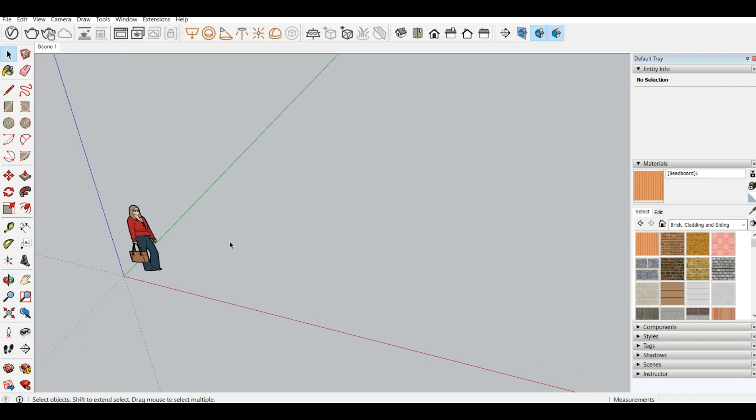In the last video you already learned about the basics of SketchUp. In this video we'll go one step further and learn about V-Ray as well. V-Ray is an incredibly powerful renderer, but it's also very easy to use, and it combines real-time and photoreal rendering.

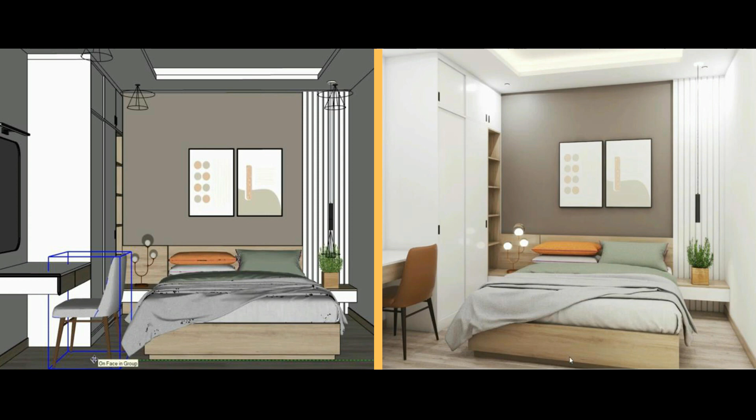I'll put up one more comparison picture so that there's more clarity. Now again, the left one shows how it looks in SketchUp and the right one shows how it looks after we used V-Ray. So you get true to life lights, cameras and materials, which gives real life like characteristics to your model in V-Ray. Basically you'll get a vision of how the real thing will look before it's even built. So the high-end materials in V-Ray provide better quality and lifelike output basically.

So I'll open the V-Ray asset editor first. All I need to do is a left click here and wait for it to open. Okay, so here we go. So this is the dialog box, and first is the material tab.

So click on the materials tab and then click on this arrow in the left hand side, and a sub window will appear. So here you can see the inbuilt material that V-Ray is providing, and secondly you can also see the create tab through which you can create a material of your liking, like you can create generic or emissive. Emissive can be used to create lighting and stuff.

Also you can see car paint here. There's bump as well, which can be used to define groovings in walls or tiles, and you can use all of these to create your own material.

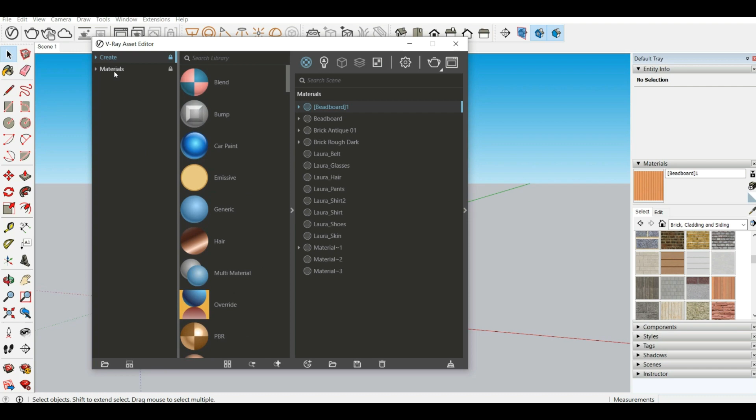In the bottom left you can see a file like icon. From there you can also import other files as well. So right here, as you can see, one more interesting thing is these brick designs which aren't available in SketchUp. These are basically the files that V-Ray offers, which you can apply on any material. These are high definition and high end materials.

Here you can see like this emissive material, which is basically used in lights. So the light basically won't have a color of its own because this is SketchUp, but if you want to show a glowing bulb, for that you can use the emissive material. And also here there are some LED materials.

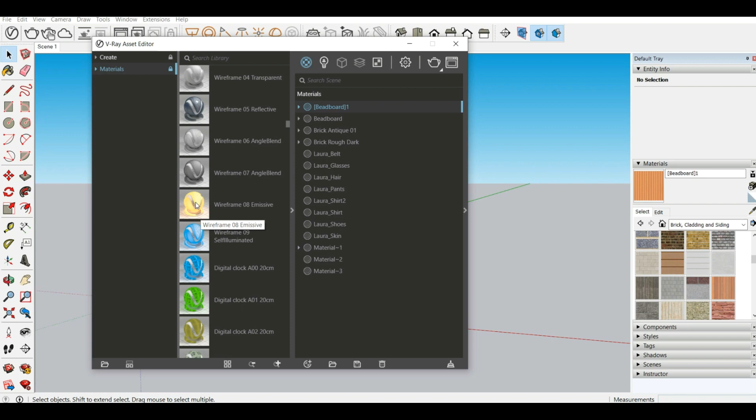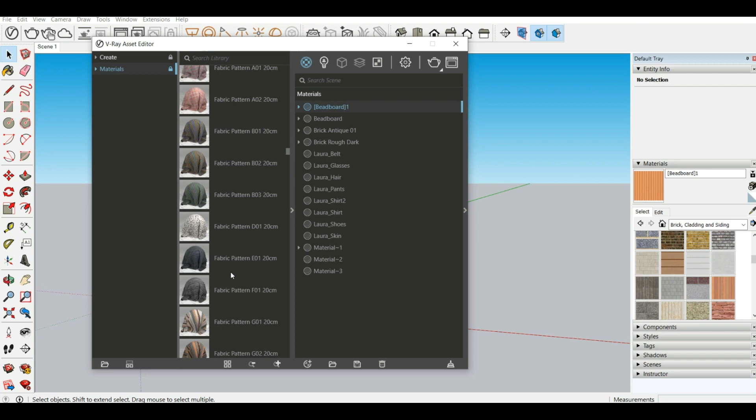After that there's carpet. You can apply material to carpet, but how to get the fibers and carpet's bumpy effect, we'll talk about that after this, on how to produce that kind of effects. Now you can see the curtains. Here are the curtains as well. Now most of the material that you require will be available here, like here you can see glass, gold, other metals, leather, water is here, and much more can be accessed through here.

After that, let's get to lighting. I'll close this one. We'll close the left hand pane and open the right hand pane.

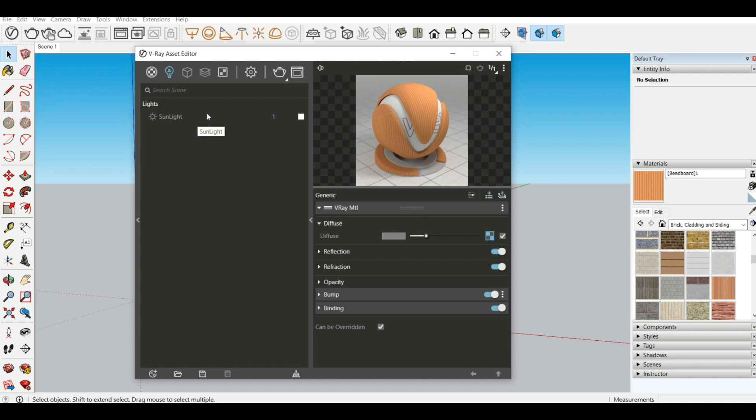First you can see here sunlight, which is present by default, but as you'll add more lighting to your model, all of those lights will appear below the sunlight, below or above, in the lights pane. And even from here you can turn off the sunlight or change its shade a little bit. All of that can be done from here.

Now as I clicked on sunlight, it shows that currently sunlight's color is white. So to change the color, simply click on the color box, and from this color picker choose the desired color for the sunlight. Here some recent color selections which I did are present as well. So from there I'll choose warm shade, and here you can see on the object a little warm effect is visible. So you can do all this by going to the color picker.

Besides the color picker is a box through which you can change the intensity of the light as well. But by default the intensity is usually the best, but of course it depends upon you what kind of intensity you want. You can also flip the switch here to quickly switch off the light and show a night view in the model.

Now also there's the switch I was talking about. Now also there's the geometry tab.

In geometry, the first section, like I just told you about the carpet and the fibers or a fur effect, that you can add from here. When we'll add on effects, they'll appear in here.

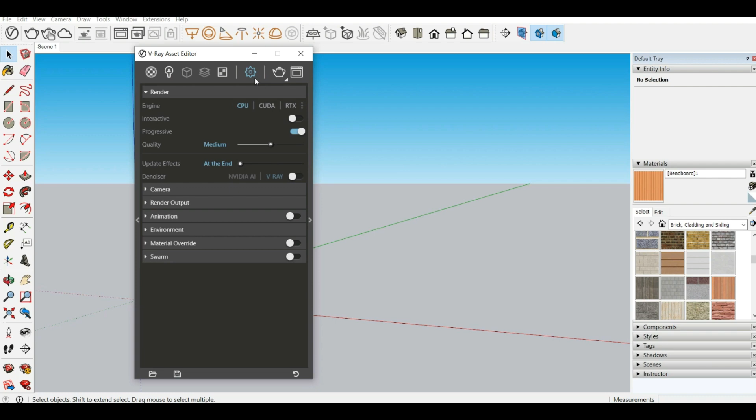Now the next important thing is V-Ray settings, so we'll get to that now. Here you can see interactive render option. Interactive rendering automatically updates the rendered image in real time as you make changes in your scene. I'll show you practically how it works.

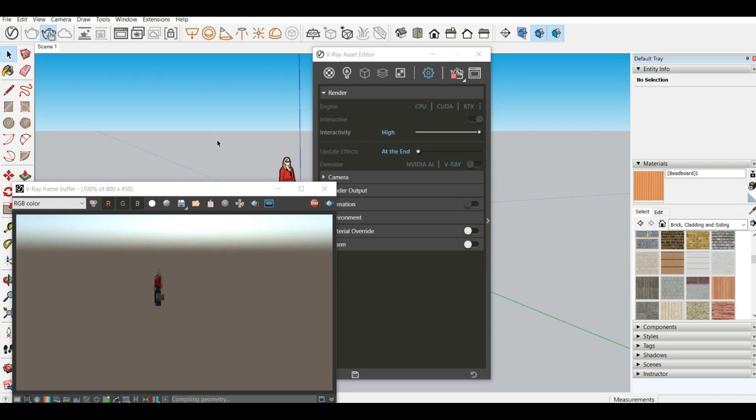I can shift camera angles or do some changes in the model, and all of that will be reflected in real time in this small window here. I can zoom in as well. So this interactive render is very useful as it allows us to quickly view how our model looks. For example, you don't want to render the whole thing, you just want to know how the model will look if you change a light within it, a single light. For that you don't need to redo the whole rendering, so you can use interactive rendering. That is basically the purpose.

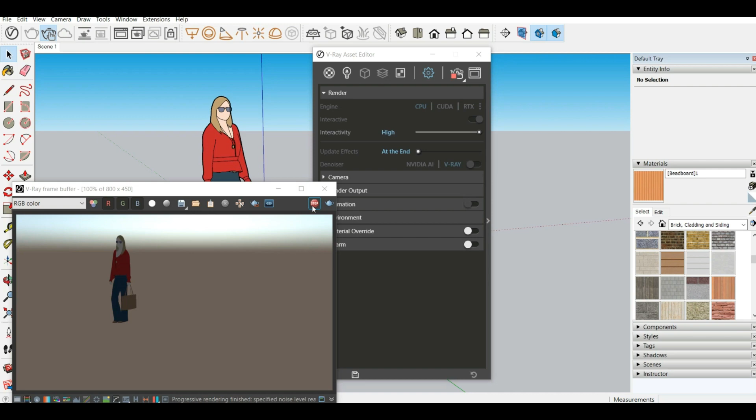Now from here you can start and stop. I'll just turn it off now.

Here now there are some more options like quality. You don't have to change much here. People stress a lot about these settings, but basically the default settings are here, as you can see. Now you can set it to very high and rapid, that will be more than enough for you. If you are having a good PC, you can create high quality outputs.

Now as you can see, there is a denoiser as well here. Basically when you render something, you can have fine grainy pixels. If you don't want that, and rather want a smooth texture, you can enable it. Now here two options, NVIDIA AI and V-Ray, are available. I'll suggest using the inbuilt V-Ray denoiser if your graphic card is not that high end. You'll also get good quality if you're using a high end graphic card.

So now we'll get to camera. In camera there's basic stuff like what kind of view you want and what kind of angles or effects you want in your scene. Like you can see there's the basic depth effect and all the other options. I haven't changed these ones, these are set to default. Now when you start working with V-Ray and SketchUp, the default settings are more than sufficient.

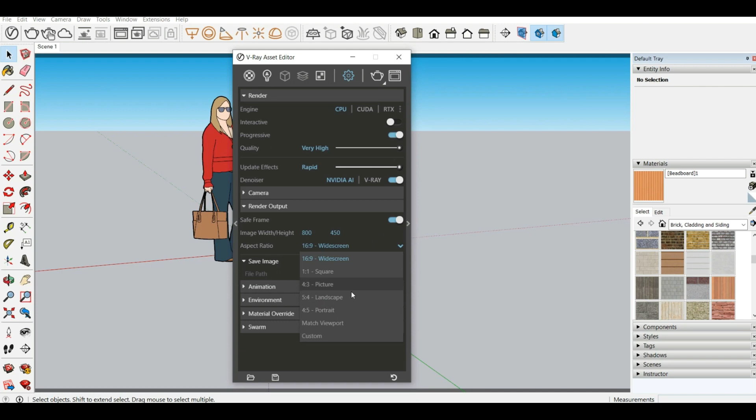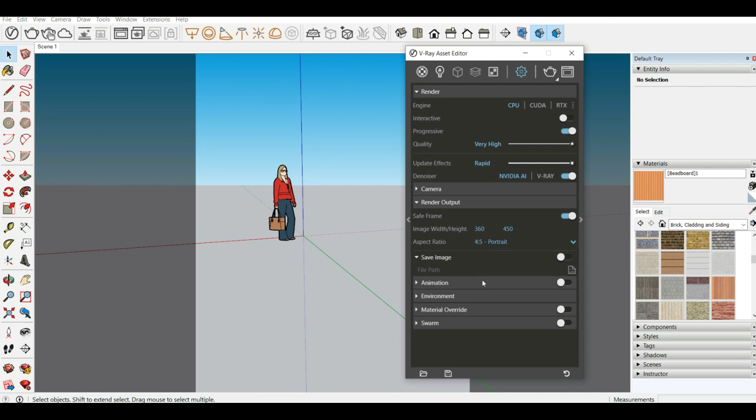Now we'll move on to the render output. Here we can do some adjustments in the default settings, of course. Like you can change the safe frame, you can make some changes here. If you want a vertical frame, you can select portrait mode and it will change the frame like this. Now if you want a render output, it will be portrait. Here you can see it in the interactive render menu, but I'll suggest keeping it to widescreen, which is 16:9. It will be best for you in the long term, and it looks good as well. That orientation is basically used everywhere.

Now you can see the animation option, which will be useful only if you make an animation in SketchUp. But for animations and video, I'll suggest that you use Lumion.

So also you can open this right arrow and view some more settings here. Now as I have kept the quality at very high, all these settings are enabled, but as soon as I lower the quality, some changes can be seen here. Now these little settings, you'll have to practice the use of, as every scene requires a different set of settings. Like if you have made a scene with the settings I tell you, and you want to add just even a single light, that can change the whole render of the model. It may increase the brightness or highly increase the exposure, so you have to keep that in mind and practice for that. So I'll just tell you some basic things like quality and denoiser, that's more than enough for the settings. Don't go that much in depth with the settings.

As soon as you get more expert when using V-Ray and SketchUp, you'll be able to distinguish what kind of settings you need. So now I'll just close this window.

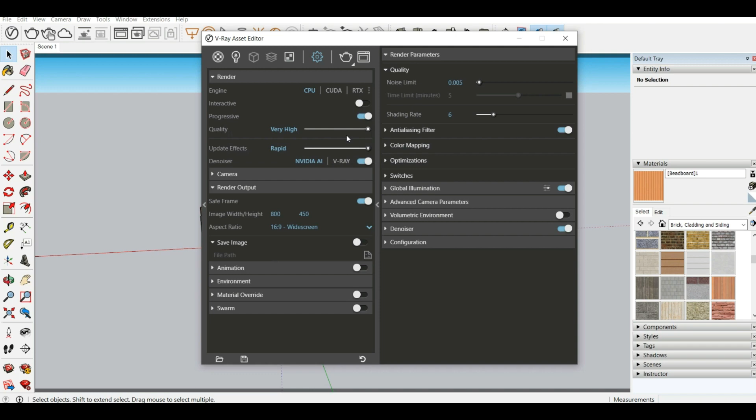Now this button is used to start or stop a non-interactive render. Like if you want to start a render, you can click on this button and the rendering will start. This is pretty basic. Also you can stop the rendering from here. Now I'll close this as well. Now this again is the interactive rendering button which I just explained.

Now here is Chaos Cloud. Chaos Cloud is a cloud rendering service for V-Ray software. Cloud rendering allows you to send your render jobs to Chaos group's rendering service instead of using your own hardware. So if you have a good PC, you won't be needing this. What it actually does is export your project and render it with Chaos group's hardware.

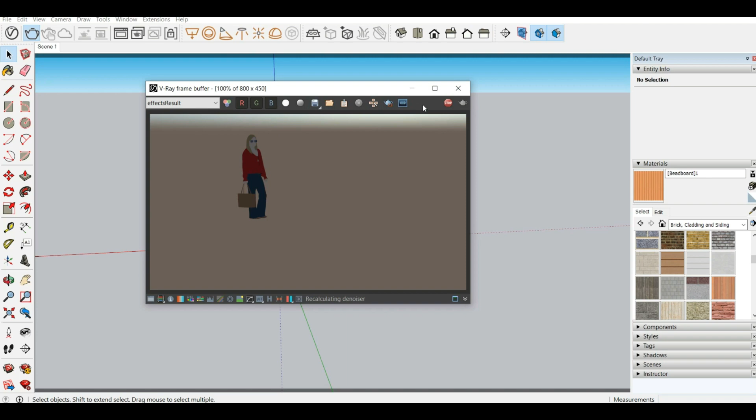I'm pretty sure this service isn't free. Then we have the viewport render and the frame buffer. This is basically the window that appears when we start rendering.

Now suppose you want to render only a particular portion of the model, like the face of this lady, and ignore the rest. I'll select it using the render region option and click on render last, and it will render only the selected region and ignore the rest. Now if I remove this and render again, the rendering of the whole region will start again. We use this option because, for example, if we add a light, a chair, or some other element to the model, or a material to it, we want to know how it will look while ignoring the rest of the region. That's what the render region option is for.

There's also a batch render, same thing, just multiple rendering instead of single.

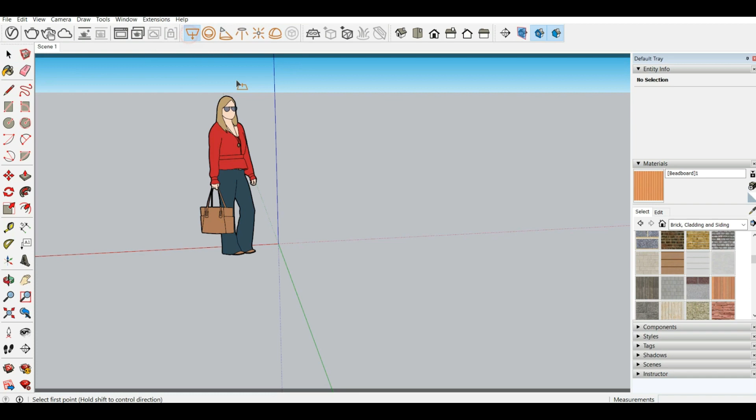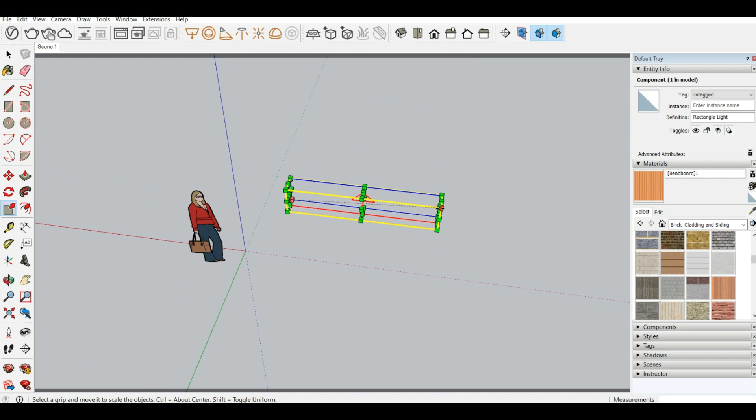So moving on, there's a rectangular light. Different lights will have different types of effects. I'll show you how this rectangular light works. This is a rectangular plane light, like a cove light which can be used in false ceilings. The effect of those lights is given like this. I'll scale this and transform it into small strips, and also scale it in length and width according to my needs and the needs of the cove it's being put into.

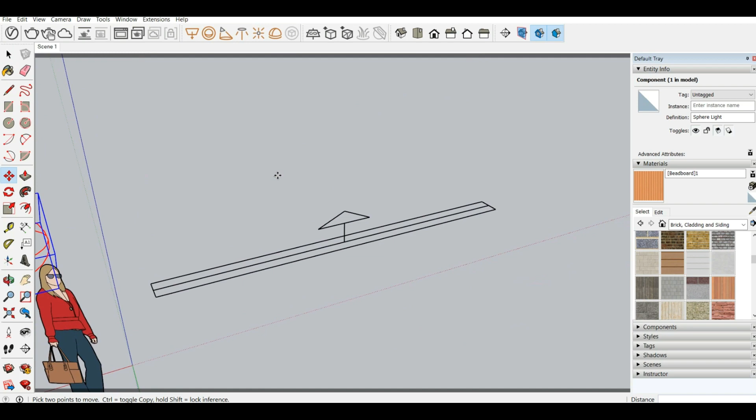Then there's sphere lights. These can be used if you want to give lighting to a bedside lamp or a bulb. I'll place it here. If you want to move it, use the move tool and place it around how you like.

Okay, here we go. Now there's a spotlight. A spotlight is a powerful light. For example, when you go to theaters, there are small lightings which can be directed so that they hit only a small area, lighting up only that area. This can be created easily like this.

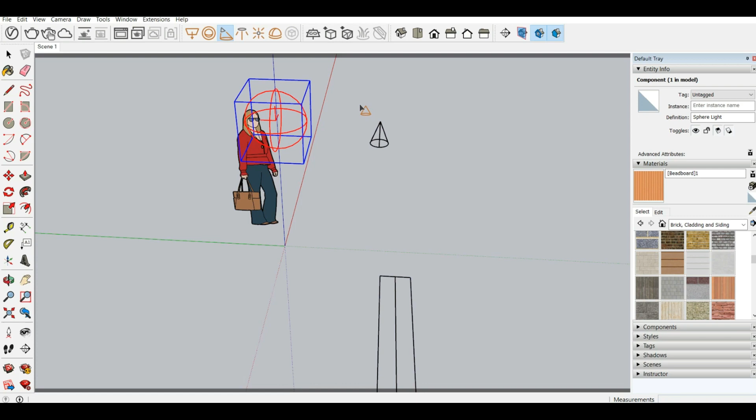Now there are IES lights which need to be imported. As soon as I click on it, Windows Explorer will appear and you need to import that light. These lights will be provided to you guys by us in the drive, probably with images, and you can get these from over there. You will be given all of these, so be sure to try these lights yourself.

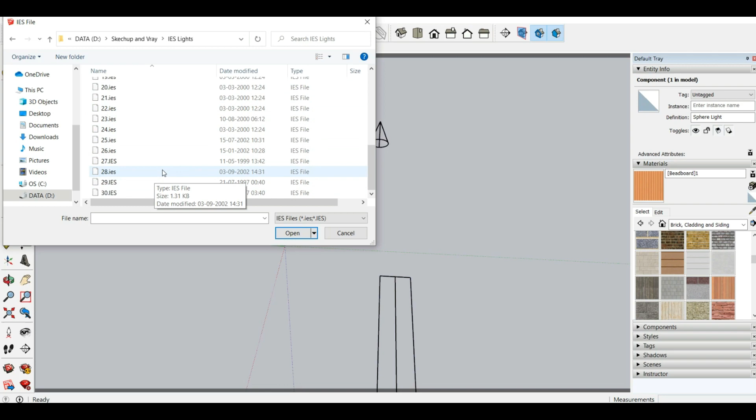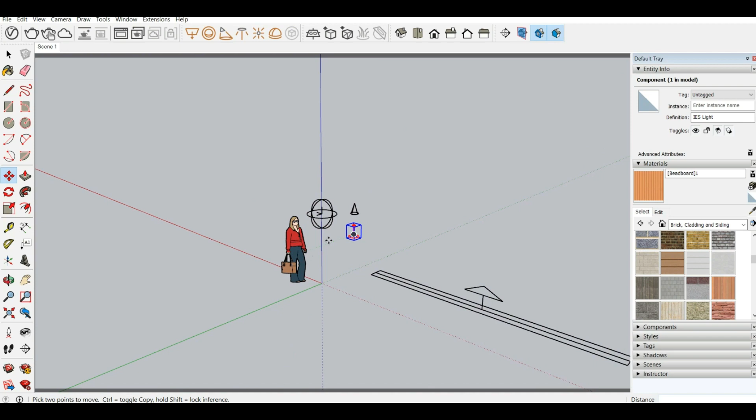Right now I'll just open any of it. So I just opened light number 30. Now it may look like it's near, but actually it's a little far from the region, so we need to bring it closer. So here we go. Now you can move it with reference to the head of the lady, so that's also an easy way to place objects.

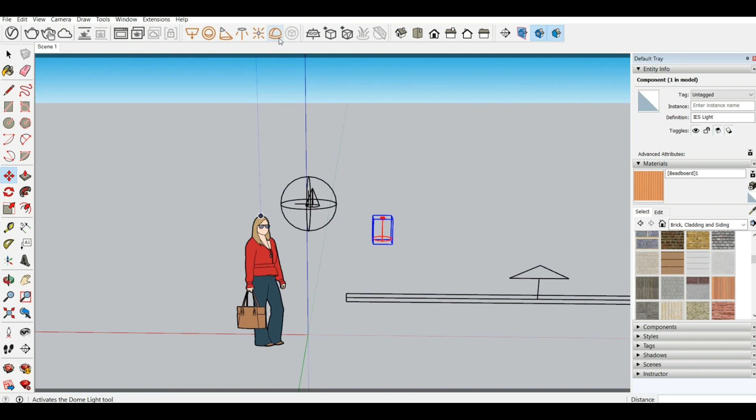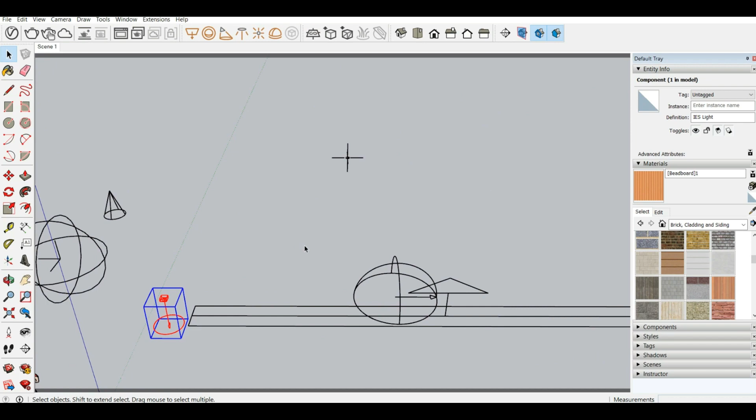Now there's the Omni light. This is a normal light, nothing to explain about it. The sphere light gives 360-degree light, and basically Omni is the same. Now there's a dome light as well, which provides light above a plane, so there won't be any lighting below the surface of the light. It will give light above the surface only.

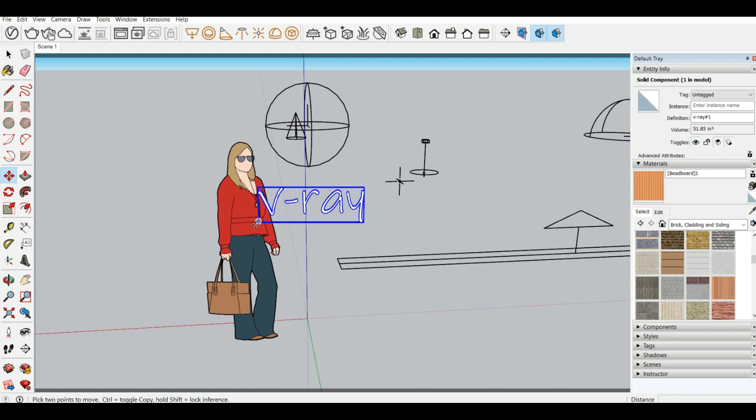So then there's a mesh light. I'll illustrate by creating a text. I'll type V-Ray, place it like this, and move it a little. I'll put up a temporary texture on it. Now when the text isn't selected, the mesh light won't be operatable, but as soon as you click on the text, it becomes operatable and the text changes into that form, becoming a mesh light. That is how you create mesh lights. You can even use other objects for that.

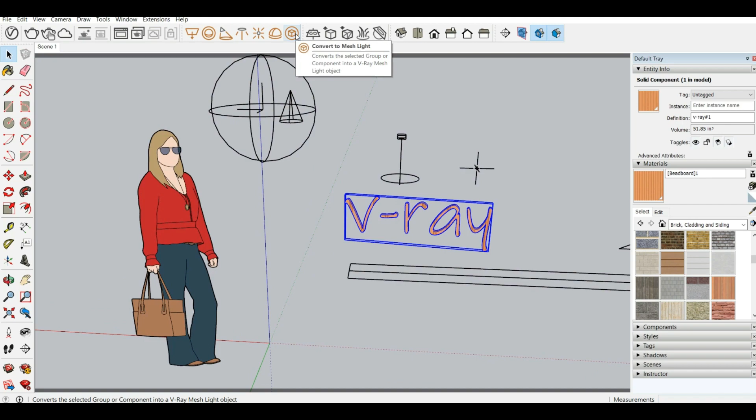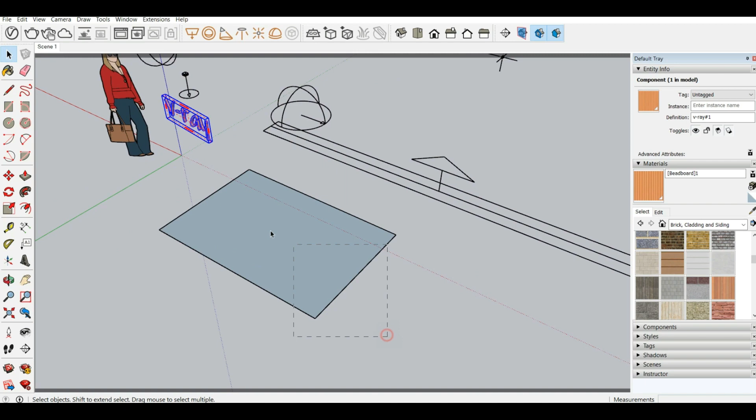Then there are infinite planes. These planes are like, suppose you create a carpet here. So I'll actually make one, using the rectangle tool to create a carpet. Now this is created. After creating it, we'll put a material over it, browsing through these materials to find a suitable carpet material in the V-Ray assets. So here I'm trying to find the carpet materials.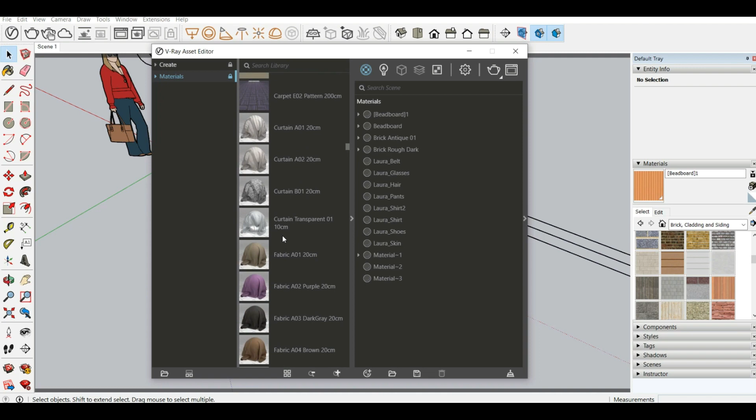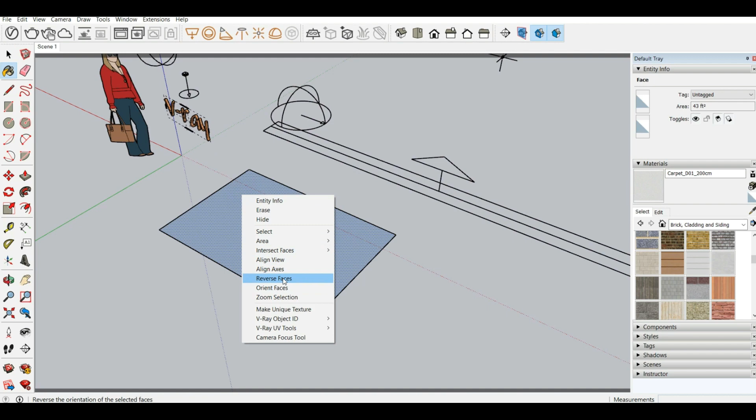Okay, here we go. So I'll select this one, and I need to drag it to the right hand side where the materials are, where the list is. I'll just drag it there, and it will become usable in SketchUp as well, as you can see in the materials box.

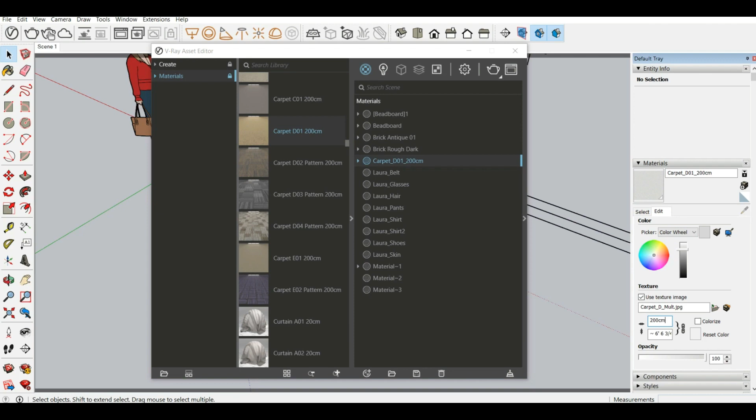Now I'll just use it, and using the paint bucket tool, I'll paint the surface. Now this doesn't look like the furry surface yet, so I'll check the dimensions in the V-Ray asset editor again. Here it is 200 centimeters, and in the materials pane, as you can see, it is only 10.

So I'll change that to 200 centimeters, and it will convert by itself, like you can see. Now I'll have to make it a group. I'll select it and right click, now click on make group. So this is now one single entity, and I'll click on add fur to selection.

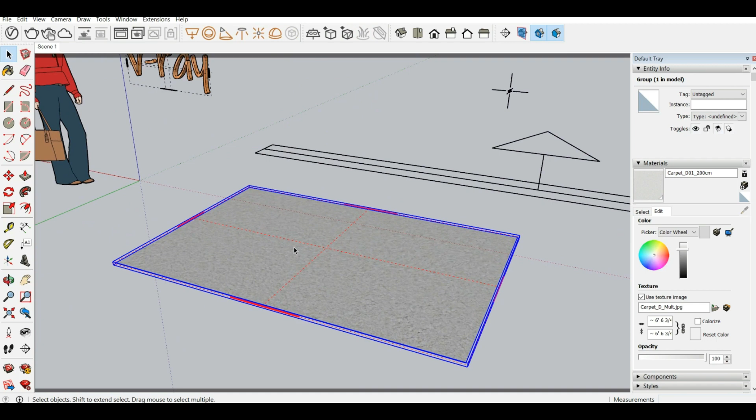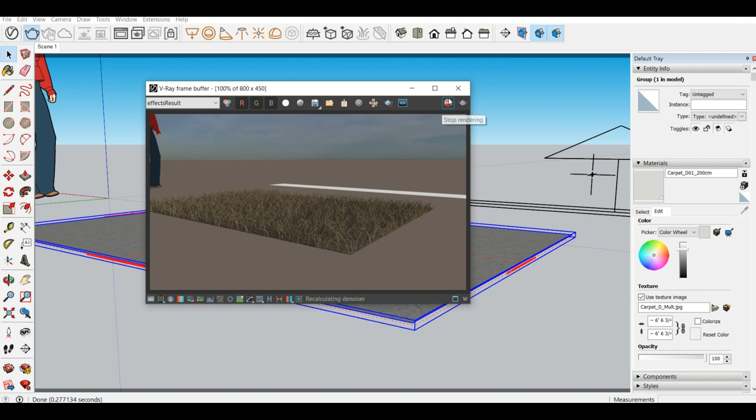Now as you can see, it is giving a risen up kind of look, and this fur will not be visible in SketchUp, but as soon as we render it, like I'm doing right now, here you go - a furry, grassy texture can be seen. So I'll just close it right now.

Now while we are at it, I'll also show you the V-Ray mesh light. So if I click on render, wait a second for it - now as you can see, it's kind of glowing, the mesh light. So this is how the mesh light will look when you render it.

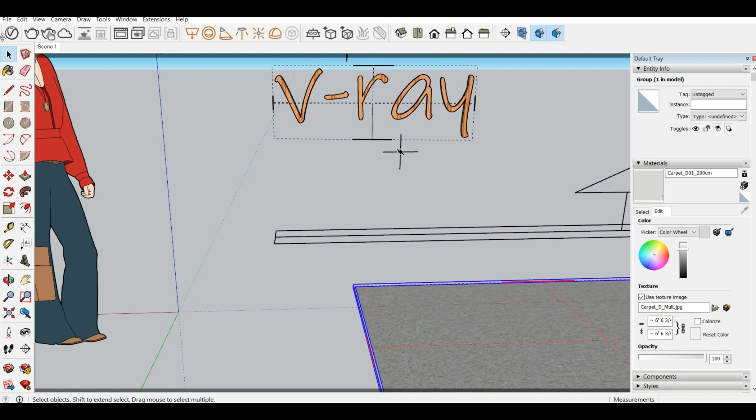So moving on, now its intensity and lighting can be changed from here. So here it's written mesh light - I'll change the name here, which will help us locate stuff easily, and for reference purposes we'll know that a light object is there that has V-Ray written on it, so we can locate it easily. This becomes handy when you have more than one light sample of the same type.

So now we can change its color, like I have changed it to blue. Also you can change the intensity from the box beside the color picker, like I have made it 80. So now there are other lights, Omni, IES, which you can also change the intensity of. Just keep experimenting with different intensities, which will help you find different combinations. So now I'll just render it for you and show you how the change in color and intensity will affect the render. So here you see.

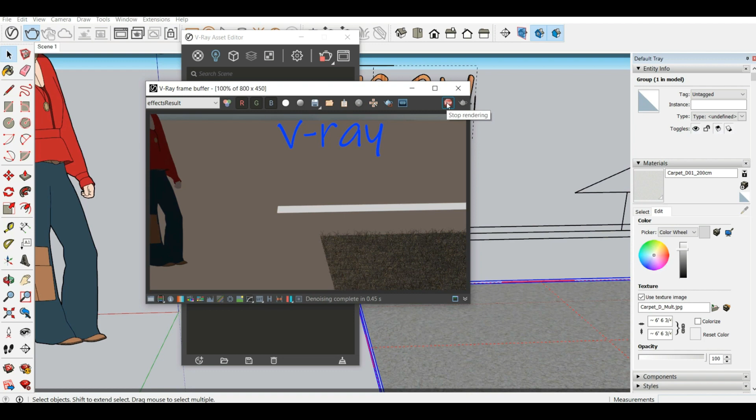Now moving to the rectangular light, so its color can be changed from here as well. Now if you want that this light shouldn't be seen, you can click invisible here. What it will do is make the source of the light invisible, but you'll still be able to see the light itself. For example, the bulb won't be there, but its light will be there.

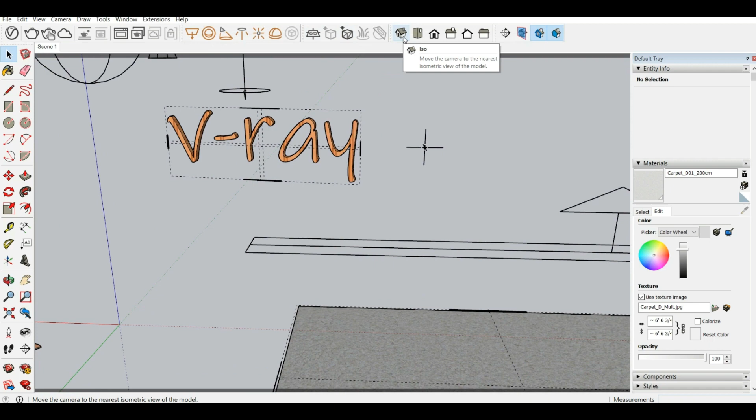So this was the lighting part. Now we'll move on, I'll just close it, and after that these are all the views of SketchUp - they are here, top view, side view, bottom, right, and so on.

Now the last and final thing is sections. Section planes cut a model along a plane so that you can peer inside the model without moving or hiding any geometry. In a 3D model, basically an active section plane hides everything on one side of that plane.

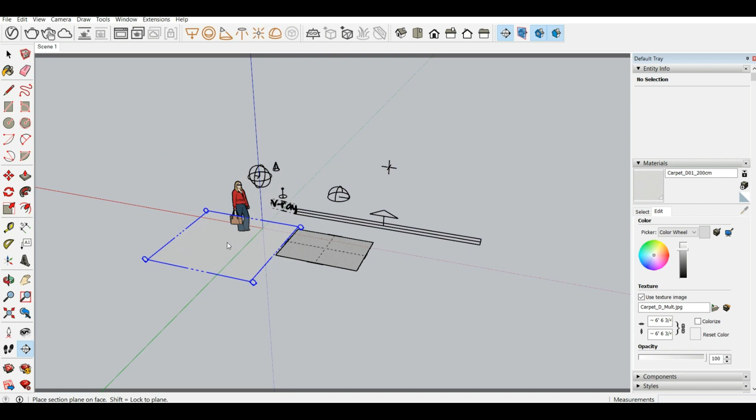So I'll show you how it will work. I'll pull up the plane vertically a little bit and show you how this will work. Using the move tool, I'm pushing it up. So here you can see the lady is also cut in half, and the V-Ray render is also sectioned like this.

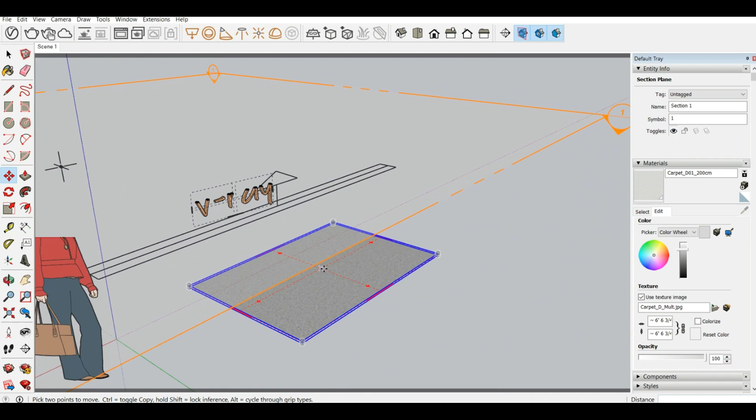So for greater understanding of how you can use the section tool, I'll put up two pictures side by side that will show you how the section tool will work. Here you go - now like on the left you can see the house before using the section tool, and on the right you can see how it looks after you do it.

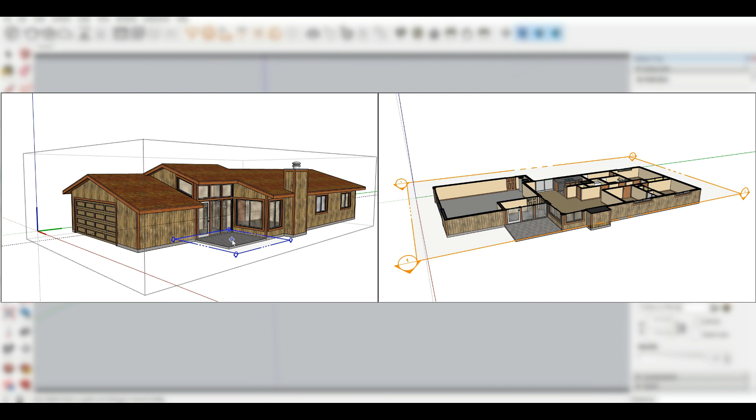So this was all about V-Ray - all the tools, rendering, lights, textures, and sections as well. So this was it for this video. Be sure to keep watching the coming videos as well, so that you can get a greater understanding of various tools in SketchUp.

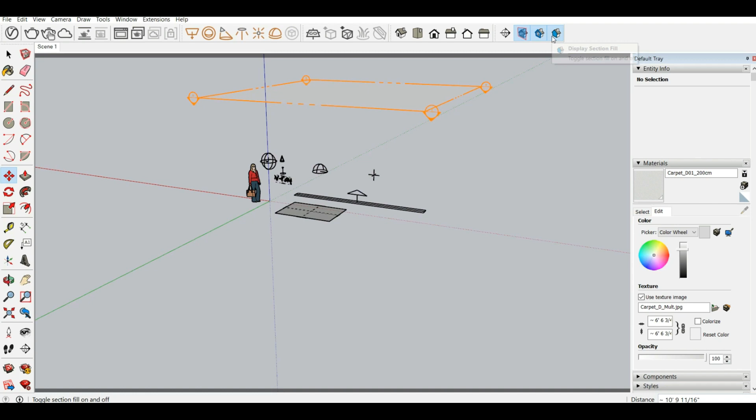Now we are going to build on all the concepts that were told in the basics video, the SketchUp video, and the V-Ray video. So now you have a basic understanding of what all the tools are and what they do. After this we'll work on importing, creating houses, creating geometry, adding chairs, adding floor plans, and different stuff as well. So be sure to watch those videos as well. So that's it for this video. Thank you.